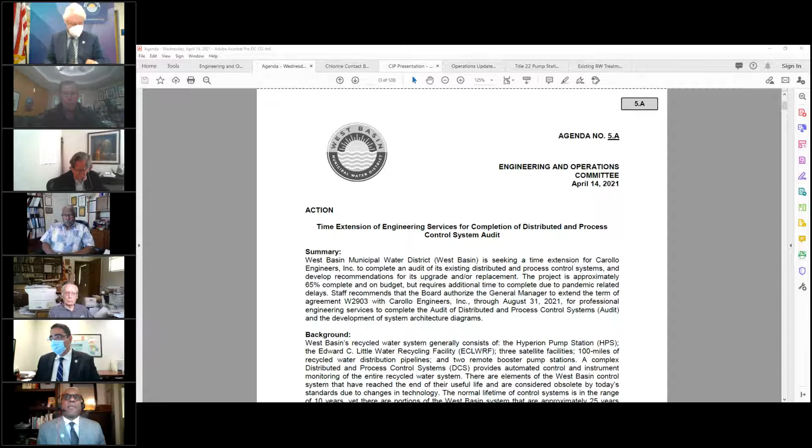In this audit phase, we have 3 major tasks being conducted. The first is the planning and review phase, which is complete. The second is the actual physical audit, task 2, which is conducting the audit and reviewing the findings, and that task has also been completed. The next is the development of technical memos to develop a direction or roadmap for the agency to upgrade their DCS system.

As part of the audit findings, we determined that about 62% of the equipment is near the end of its service life, which impacts the organization and represents a problem for getting spare parts and keeping the system up and operating. Some of the components' technology is as old as 25 years, while the general useful life of a control system is about 10 years. It moves quite fast with the technology, so we have bottlenecks within the system which make it very difficult to get data across.

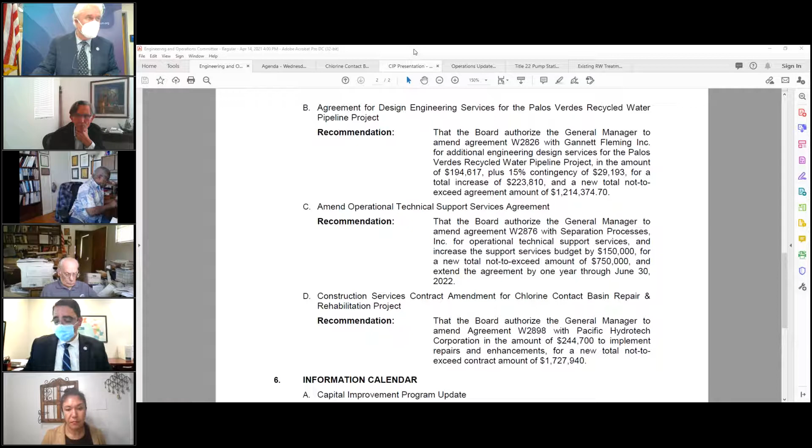And so there's some redesign work and other work associated with the project that we need some additional funds to cover, so we can finalize it and move ahead. We have our excellent supervising engineer, Veronica Govea, who's been with this project from day one. Veronica, would you please handle this matter for the board and public and everybody here? Thank you, Patrick.

Good afternoon, Chairman Alvarez and members of the committee. I'm happy to present this new project. Well, it's not a new project, but better news from the past, in regards to now we have an approved pump station site. So please follow me to agenda number 5B on page 6 of your packet to discuss the agreement for design engineering services of the Palos Verdes recycled water pipeline project.

West Basin and Gannett Fleming entered into an agreement, W2826, for the design of the Palos Verdes recycled water pipeline project. This project consists of approximately 3.6 miles of new recycled water pipeline and will also include a 500-gallon per minute pump station. This project will deliver approximately 240 acre-feet a year of recycled water to 7 sites within the cities of Torrance and Palos Verdes Estates, and this water will be utilized for irrigation purposes, serving parks, schools, medians, and a golf club.

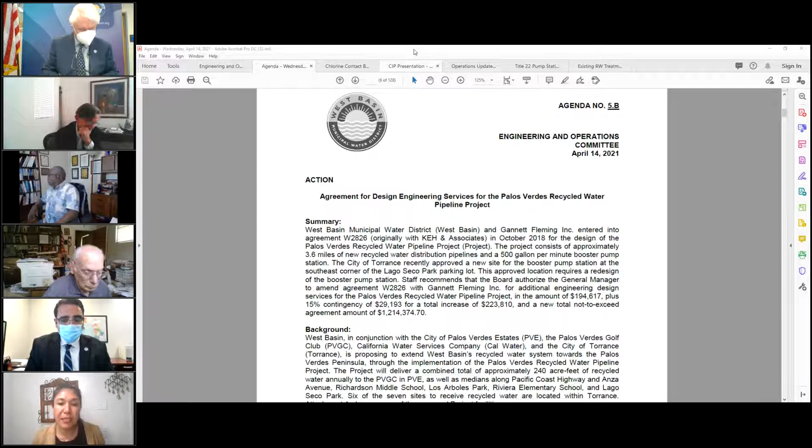On your packet, under page number 10, we included a map of the region. So the alignment, as well as the project sites that will be targeted, can be located on that particular attachment A.

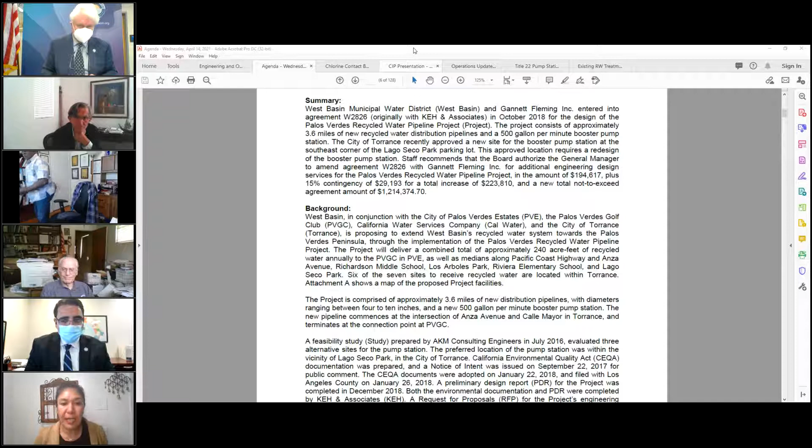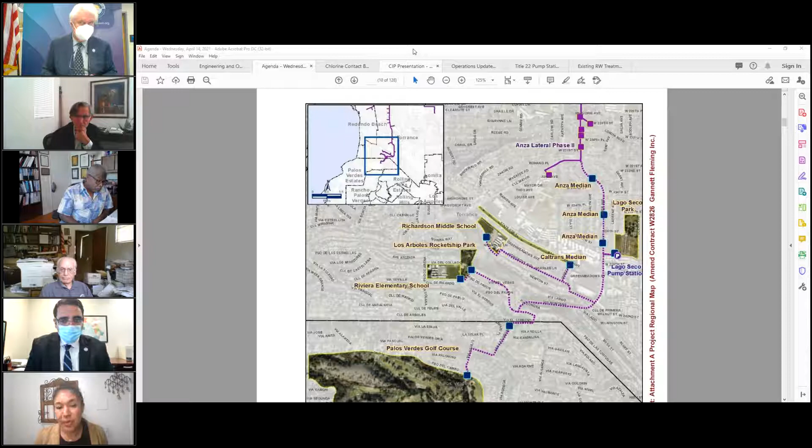To briefly summarize the project, over the last couple of years, staff has been able to complete several items, which includes the feasibility study, the CEQA documentation, the preliminary design report. We have also coordinated staff meetings with the city representatives of Palos Verdes and Torrance. We have performed outreach, advanced the design of the pipeline, and addressed comments received from the public and city officials. We have worked with some permitting jurisdictional entities to advance all the permits needed for the project.

We have also prepared renderings, layouts, and analyzed several pump station sites, as Patrick mentioned earlier today. And again, we have made several presentations to city officials, chambers of commerce, and associations, and we have been able to obtain some project support letters from these entities, which you can also find in your attachments in the packet.

As Patrick mentioned, we recently got approval from the City of Torrance City Council regarding the proposed pump station. It's important to mention that the proposed pump station site that was approved is a new site, 400 feet east from the original location, which was the preferred location that West Basin had originally looked forward to installing this pump station. The new location is still within the same park area; however, this new location was generated from feedback we got as we progressed on this project from the public and from cities. For references on the locations of the pump stations, there are a couple of attachments addressed in your packet.

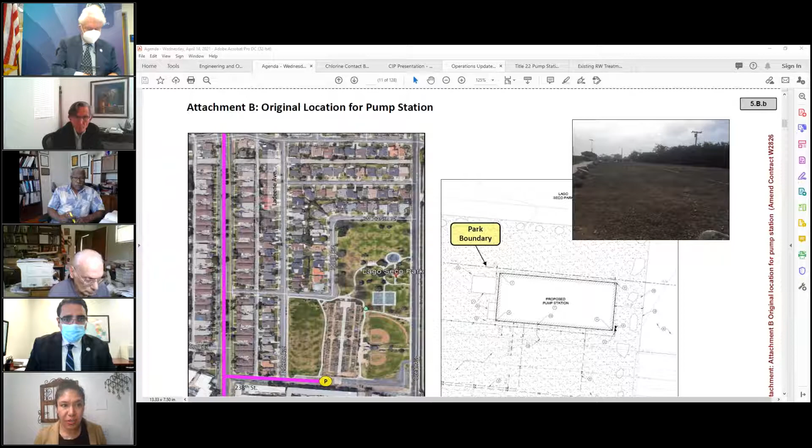One thing you'll notice in this exhibit is that the ground cover is different. On this site there's a parking lot requiring some site adjustments, and there are utilities in the area that we'll need to work around in order to install the pump station in this location.

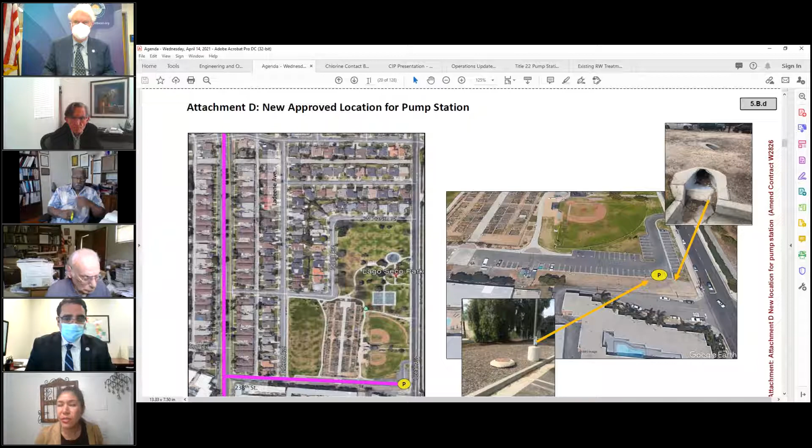To complete the design, we'll need additional engineering consulting services for permitting and design work, including additional geotechnical investigations since this site is outside the original location, as well as geodetic or survey analysis and testing, designing the pipeline extension from the original to the new location, and modifying the existing site and utilities in the area. With this, I will read the recommendation.

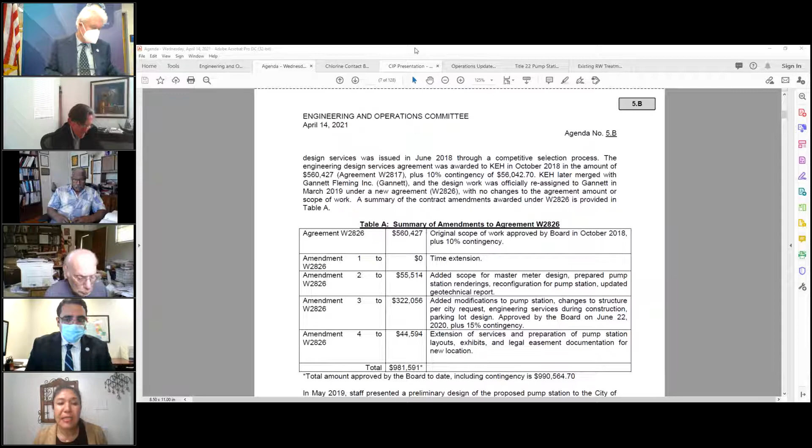The recommendation is that the board authorize the general manager to amend agreement W2826 with Gannett Fleming for additional engineering services for the Palos Verdes Recycled Water Pipeline project in the amount of $194,617, plus a 15% contingency of $29,193, for a total increase of $223,810, and a new total not-to-exceed agreement amount of $1,214,374.70. Thank you for your attention, and I'll be happy to answer any questions.

Okay, well, thank you very much for the report. Any committee member comments or questions? Yes, Mr. Alvarez, if I could.

I'm very excited to hear about this. It was back in March 2016 when I first got really excited about this project, and then things kind of went on hold. One thing we're really concerned about is the public support for the project going up the hill. I know early on there were some people in Torrance with concerns about wanting a water line for the people on the hill, so I hope we were able to work that out through the Torrance city council to smooth that road, so we won't have that problem when they go up the hill.

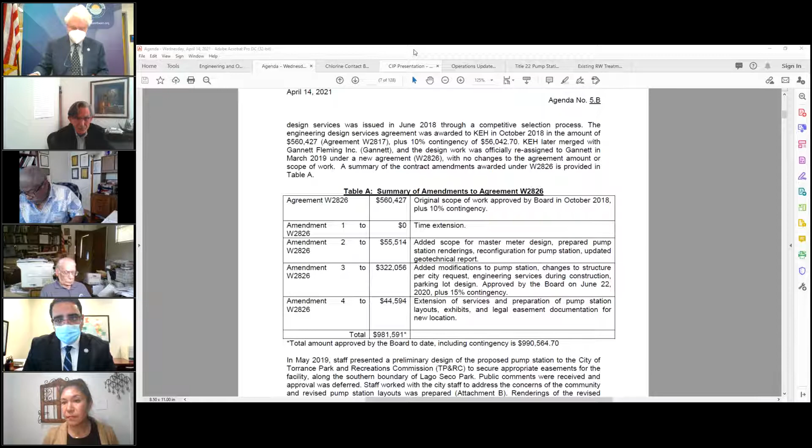Okay, going back to the budget. On this portion, the full $1.2 million that we're, if this approval goes through, money for that is currently available. This is not money that is going to be put into CIP that's subject to the approval of the budget. We're talking about money that is currently available.

The project itself was part of this capital budget approval for this year. We anticipated being in construction right now as we speak, but because of the delays we haven't. So there was, I think it was north of $9 million approved for the capital budget for this project for this fiscal year that we won't be spending in this fiscal year, but it would instead go into the next fiscal year when construction starts.

My question is very simple. The money is currently budgeted for this project when we have the money. Yes.

Okay, next question is, you mentioned that the overall total cost of the project is $12.9 million. Is that inclusive of this, or is that just the construction costs? It includes it. So design, construction, and construction management is going to be about $12.9 million. It also includes all the past costs and feasibility study, PDR, that kind of stuff.

Okay, and if I go to some of the comments that the general manager made earlier, we have right now about $5.6 million that it's either been obtained through grants that have been already approved and or commitments from some of the users.

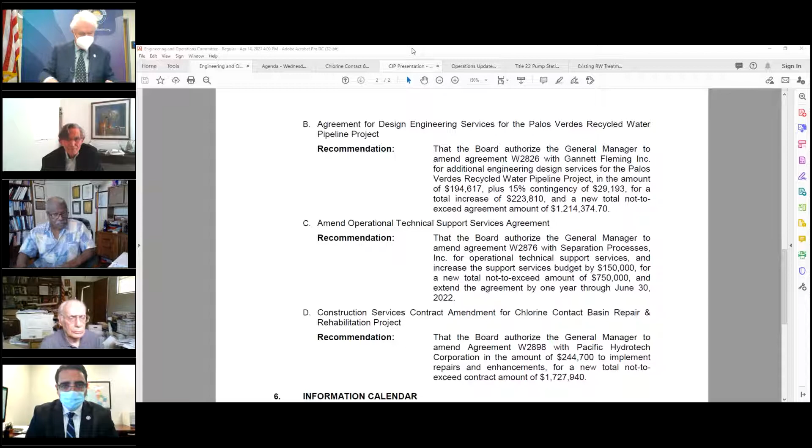All right, next item up. Next item up, Chairman Alvarez, is item 5C. This item is related to the technical support services agreement that we've had in place since, I think, the inception of the entire recycled water program.

And principally this relates to support for the low and high pressure membrane technology, operationally and otherwise — low pressure being microfiltration, high pressure being reverse osmosis. The last time it was bid out, about 18 months ago or a little less than 2 years ago, SPI, with Hazen Sawyer subbing to them for the complete package, were awarded the bid — I think it was $600,000 for 2 years.

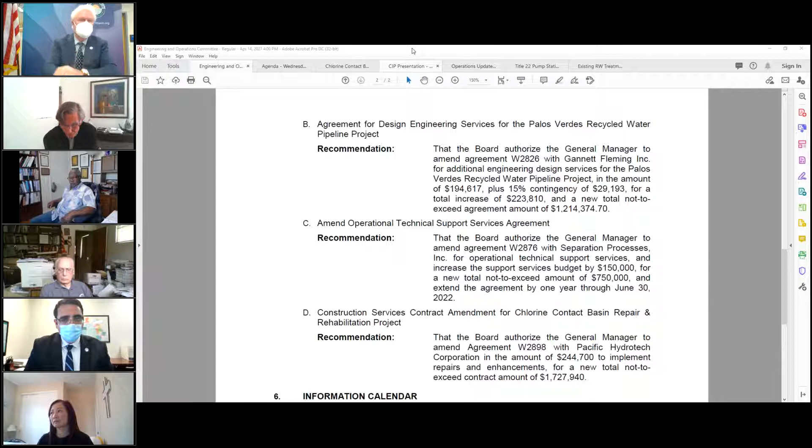And some of the work again was impacted during the pandemic. Some of it wasn't done, some was not completed. Staff here will be asking for an extension of this existing contract with some additional money, not a whole lot, for 1 year, for continuity.

And I understand that we have Susanna Lee here who can speak to the performance of these guys who have been working for us and what we're asking for. Susanna, who's our engineer — operations engineer, I should say. Sorry, Susanna.

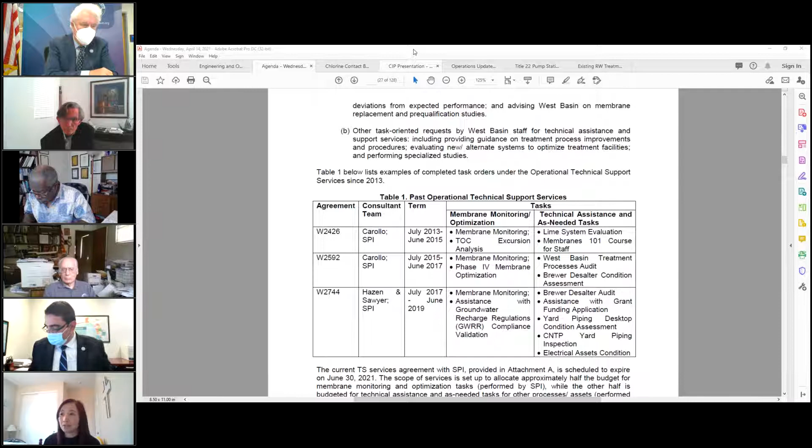For the membrane monitoring and optimization tasks, they include third-party audit and condition assessment of the membrane to ensure we maintain compliance as well as meet customer specifications, and developing trends, analyzing water quality, and troubleshooting any deviations from expected performance. All these are really critical to successful membrane operations and have to be done on a regular basis. Besides these monitoring tasks, consultants in the past have also provided their industry knowledge on membrane applications, development of membrane specs, and valuable inputs in helping West Basin develop groundwater recharge regulation compliance requirements.

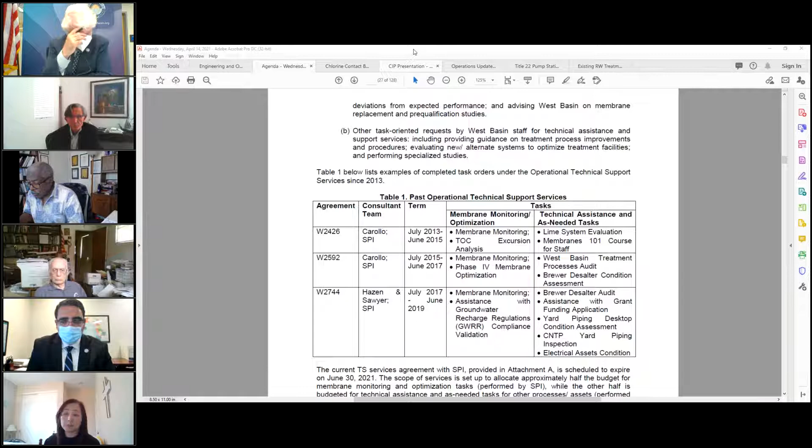On the other tasks, those include providing guidance on treatment process improvements and procedures, and evaluating new and alternative treatment systems for optimizing the current existing treatment facilities. You can refer to table 1 on page 27 of your packet for some of the major tasks done in the previous contracts.

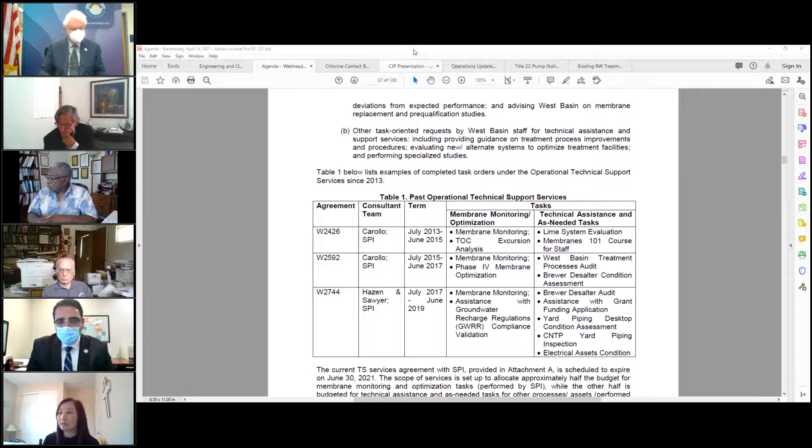Coming back to the purpose of this memo, the current contract, as Patrick mentioned, has a value of $600,000 and is set to expire on June 30th of this year. As mentioned, SPI and Hazen Sawyer are the consulting firms on this contract. The scope of services is set up to allocate approximately half the budget for membrane-focused tasks, headed up by SPI, while the other half is budgeted for technical assistance and as-needed tasks for other processes, mainly performed by Hazen Sawyer. The ongoing membrane-focused tasks have been carried out as budgeted.

However, due to COVID restrictions, much of the as-needed tasks for other treatment processes has been delayed this past year, and we're just resuming those projects or tasks. Table 2, also on page 27, lists the tasks that are ongoing and scheduled to be completed later this year. There's approximately $89,000 of the remaining budget for Hazen planned to be utilized later in fiscal year 2021 and 22.

As Hazen continues to complete these tasks, staff is coming to the board requesting and recommending to provide additional funding to the SPI portion of the technical support services scope, as this provides continuation for the membrane monitoring and optimization tasks. Staff is also requesting a 1-year extension, which will also allow the other technical and as-needed tasks to be completed. Please see attachment B for a copy of the proposal.

Before I read the recommendation, as pioneer and champion for development of the recycling water program, West Basin produces multiple types of advanced treated water and variable source water. This success is really attributed to strong West Basin leadership and dedication from our operators, but also to our partnership with industry experts in membrane technology and other technology.

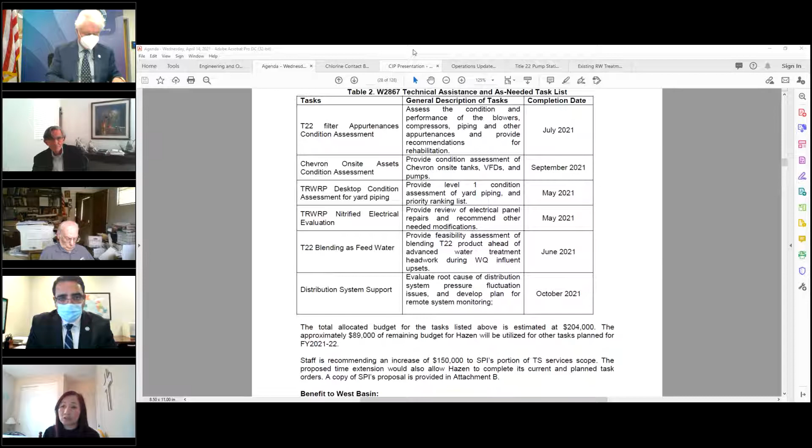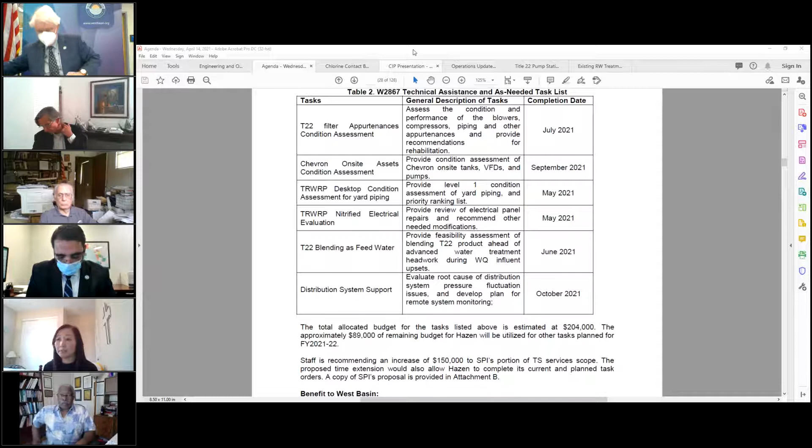This relationship has served as a conduit to allow West Basin staff to have industry insights, not only into membrane technology, but more importantly, to provide information on recycled water compliance and regulators, because many of these consultants serve on expert panels for R&D studies and regulatory committees.

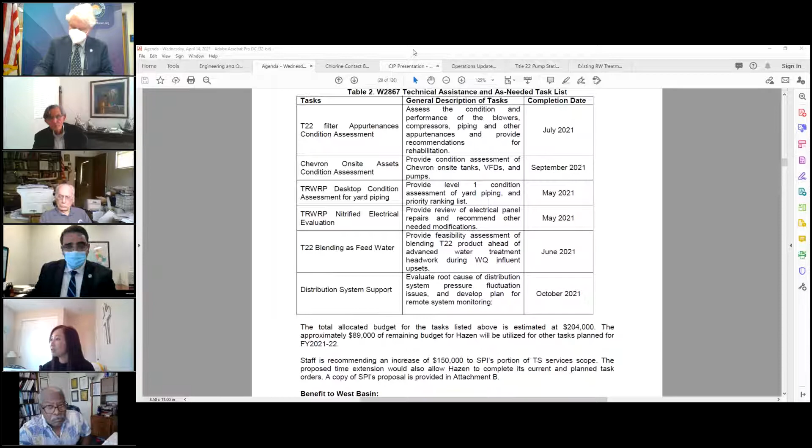So with that, I'd like to read the recommendation: that the board authorize the general manager to amend agreement W2876 with Separation Processes, Inc. for operational technical support services, and increase the support services budget by $150,000 for a new total not-to-exceed amount of $750,000, and extend the agreement by one year through June 30th, 2022. With that, I'd be happy to answer any questions.

Okay, well thank you very much for that report. From the committee members, do we have questions? I have a question: has this process been helpful in getting us the awards that we receive concerning our recycled water system?

In helping us to get what? Because of the quality of water that we produce, the customer relationships that we have—if we were doing a different kind of membrane or whatever, would we or would we not be able to get these awards, to perform at such a high level that we get these awards?

Yeah, I could maybe take a shot at that, Susanna. Good question. One of the very distinguishing characteristics of the success of our Great Recycled Water Program is that West Basin has been a pioneer with membrane technology. We started out with lime clarifiers back in the mid-90s, and then we were the first in the US to go to microfiltration instead of using lime clarifiers as a pre-treatment for RO.

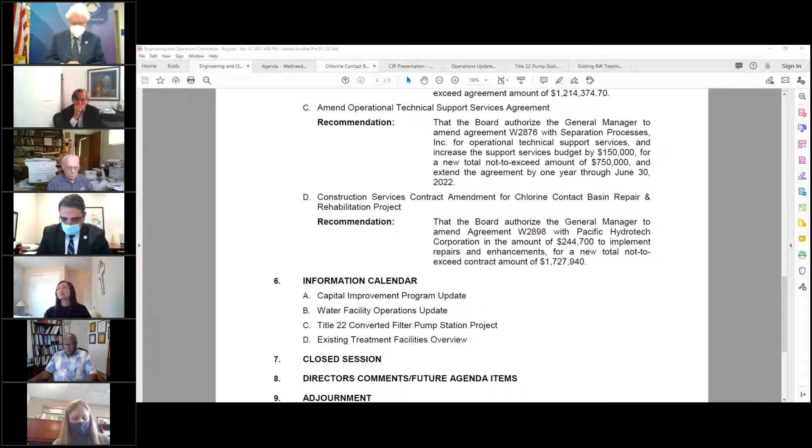So that's the question. Yes, well, if I could direct you to the fiscal impact back at page 29 on this, we have this on every single item we bring to the board. The fiscal impact in this particular one, and this is typical, says funds will be included in the fiscal year 21-22 operations budget. That's what we look at. Looking forward, we're including that in the budget, which the board has to approve.

Okay, any other comments? I would say that we can move this forward with the understanding that Margaret's going to look into finding the $150,000, and that will be included in the recommendation to the full board. Is that okay with you, President Williams? Yeah, I thought we know where the funding's coming from, don't we?

Yep, it's going to be included in next year's budget, but Director Alvarez is saying for this, he wants to deviate from that normal process and have the recommendation include money taken out of designated funds, assigning that $150,000 to cover next year. So it wouldn't be in the budget, kind of sort of, but it would be part of the recommendation. So we have to look into that.

Yeah, well, I think that should be done during the budget process. But for this, I would approve it. I wouldn't say I wouldn't approve this, but I do approve this going forward. I don't see anything that would stop it from going forward, so when Margaret's work on changing the way we encumber the funds wouldn't affect this project at this time. Follow me?

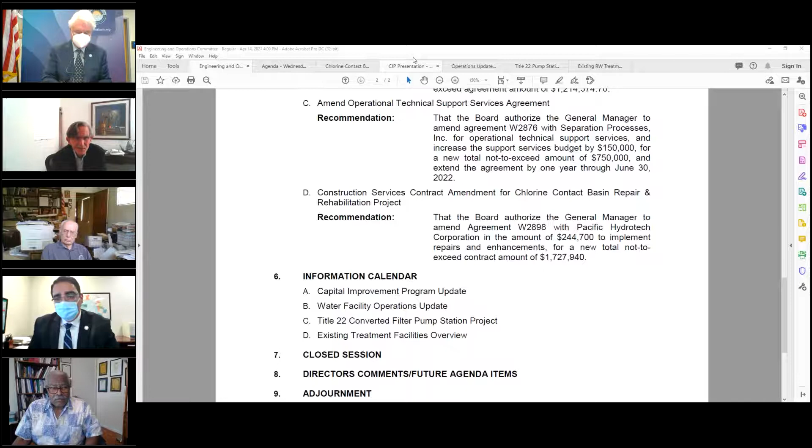So my understanding, and what I'm supporting and recommending, is that we move this forward, and in that process we take $150,000 out of reserves. Those are not committed to anything—that's reserves. I'm sure we've got $150,000 in reserves that will then be allocated to fund the project at the time the extension's approved by the board in a couple of weeks.

Okay, no confusion here. That's what Margaret will look into, and if that's all a go, we'll word it as such. Is that okay with you, President Williams? No, but I'll go along with it.

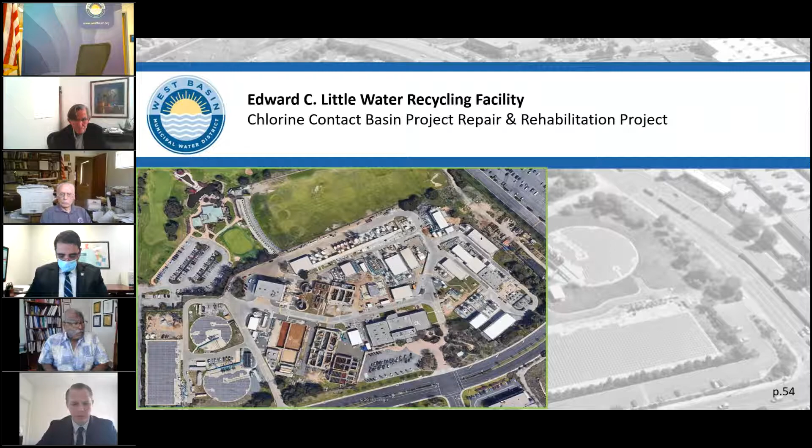Just to give a quick overview of the basins themselves, here's an aerial view of the Edward C. Little facility. Patrick mentioned they're in the southwest corner of the facility along Sepulveda Boulevard and Hughes Way, right at the corner. There are 6 chlorine contact basins in total.

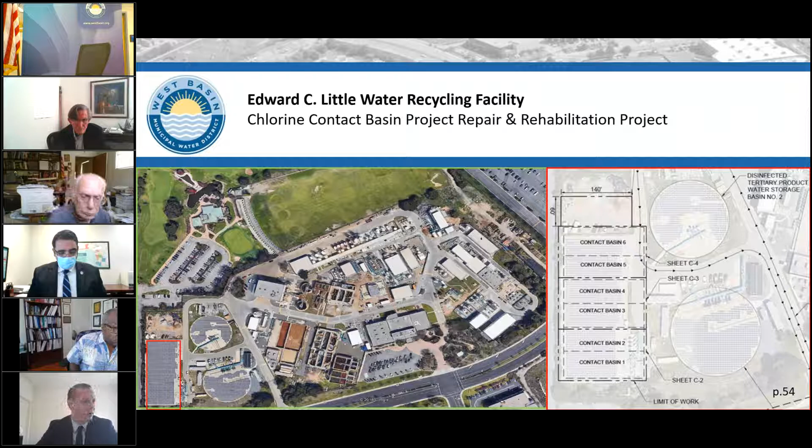They serve as the last stop in the treatment train for our Title 22 water quality—that's our irrigation water quality that goes out to many of our customers, as well as all the satellite facilities. So it's a very integral part of the process at the facility.

These are underground basins, so when you're out on site at Edward C. Little, you can't really see much. All you see is a bunch of solar panels, but underneath those solar panels are 6 basins. Here's what they look like if the lid was removed. As Patrick mentioned, they're set up in a serpentine-like manner.

You can see there's 1 slide gate for each basin that controls the influent water. That's followed by a dispersion wall that helps break up the flow and disperse it before it hits the first baffle wall. Following the dispersion wall, there's a series of 4 baffle walls for each basin. Essentially what these baffle walls serve to do is slow down the flow of water to provide the specified contact time that our Title 22 water quality needs to ensure proper disinfection.

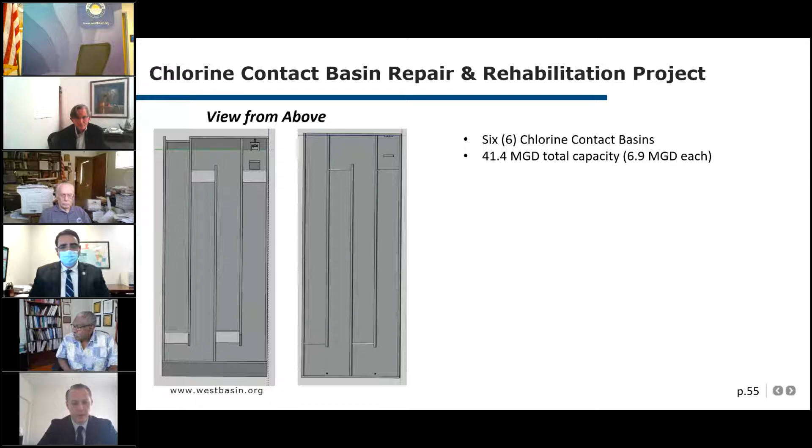So across all 6 basins, they're capable of treating about 42 mgd. I think currently we push about 30 mgd through them. Each basin has 4 channels. They measure about 123 feet long, 11 feet wide, and 14 feet deep. So these are fairly large underground basins. Patrick mentioned the total volume is over 500,000 gallons, about 1.7 acre feet. So pretty significant volume there.

So essentially we were going to replace all 6 slide gates, 1 for each basin, all 24 baffle walls, which were previously made of redwood, now installed with a more chlorine resistant fiberglass reinforced plastic, also called FRP. We also replaced the 12 mud valves, 2 for each basin, that help drain down the water to facilitate cleanings, as well as the high pressure water supply piping that allows us to clean the interiors of the basin.

As Patrick also mentioned, the project is substantially complete now. The contractors completed 100% of the base scope of work. Overall, it was a great project, a great success. We came in under budget and on schedule, under budget in all 3 categories as well, which was pretty unique. We were under budget on the construction side, under budget on the CM side, and also on the design side.

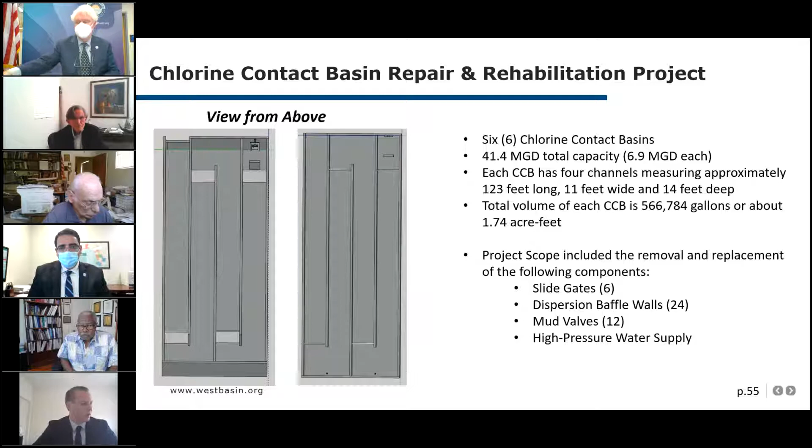I wanted to also highlight a few of the construction elements. It was a pretty unique project in that we really couldn't begin any of the work until the slide gates were replaced. Some of the seating gasket material around the slide gates had begun to fail and wasn't providing a complete seal when the basin was closed and attempted to be drained down. So we actually used divers, and we replaced all 6 slide gates with the use of divers while the basins were in service. Pretty neat construction feat.

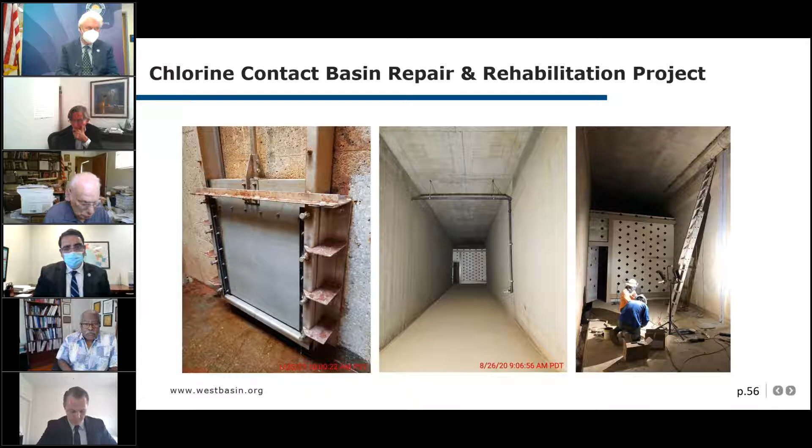So ultimately what we found was that the forces from the initial filling of the basin created an excess pressure, an abnormal pressure essentially, and that pressure was greater than the initial design strength of the baffle wall.

So it is a good thing we caught this now before the project was complete, and we completely released the contractor. We're able to engage them as well as the design engineer, the operations team, myself, and the construction management team, and together we've come up with a proposed solution that will fully fortify these baffle walls and provide for a more flexible operation moving forward. As I mentioned earlier, that solution is a third horizontal cross member.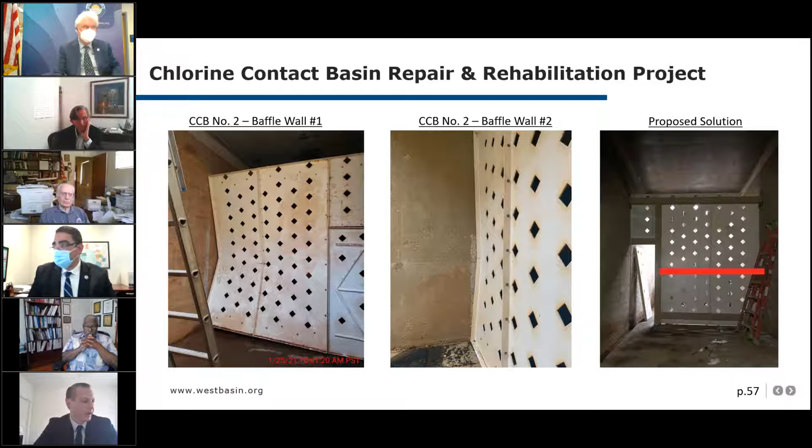After a couple months of detailed discussions with the design team, doing long-hand calculations and calculating the forces, we realized that we did exceed that 18 inches of differential head strength. We also did a pretty neat computational fluid dynamics model. Essentially, what this does is model the basins in real time—we mapped out the baffle walls exactly how they're built, exactly how the channels are built. Through simulations, we found that we were exceeding about 20 inches of differential head strength.

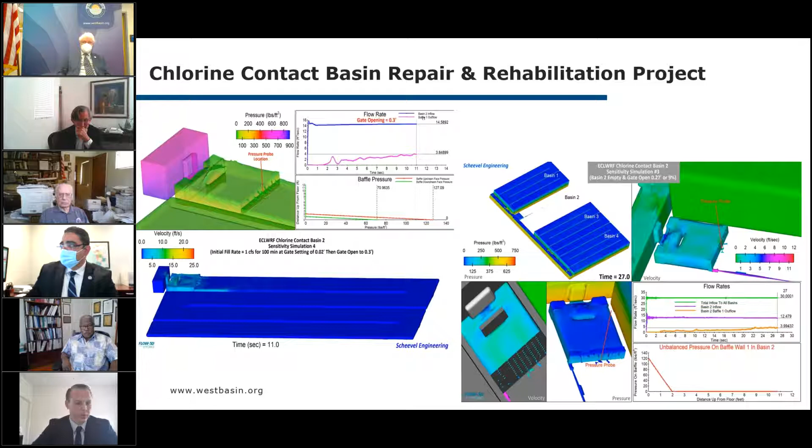So looking forward, we've designed an improvement to our system—the new baffle walls. Here's a simple cut sheet of what the improvement will look like. It'll allow up to 48 inches of differential head pressure, creating an operational environment that's fail-safe with a safety factor of well over 3.0.

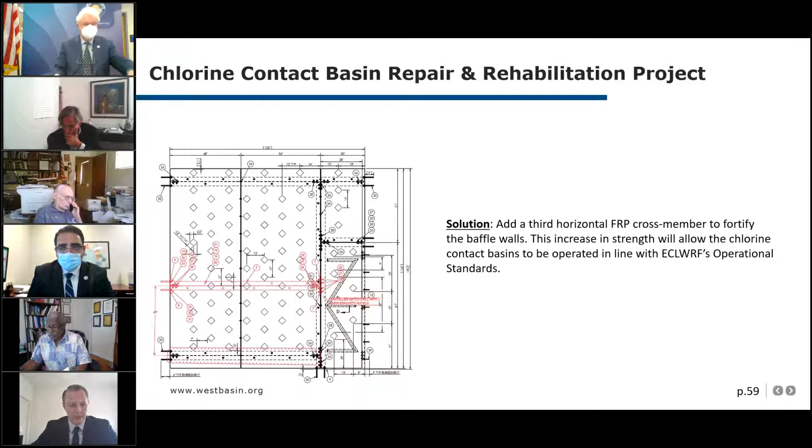So ultimately, the recommendation I'm providing today is that the board authorize the general manager to approve the specified amount, but that we proceed on a time and materials basis, and I think we'll be able to capture some additional cost savings there. So with that, I'd like to read the recommendation.

The recommendation is that the board authorize the general manager to amend agreement W2898 with Pacific Hydrotech Corporation in the amount of $244,700 to implement repairs and enhancements, for a total not-to-exceed contract amount of $1,727,940. With that, I'd be happy to take any questions.

All right, thank you very much, Kevin.

Any comments from the committee members? Yes.

Question: is this amount a change order to the contract or an amendment to the contract, or what? And then the follow-up is, who pays for this?

Correct, yes, this would be a change order to the contractor. We've been able to successfully issue two previous change orders using the approved contingency. We were able to address a few changed conditions, a few extra points of corrosion and leaks in the basins, so we utilized the previously authorized contingency funds for those outside-scope items. But yeah, as mentioned, we would be paying for this at West Basin.

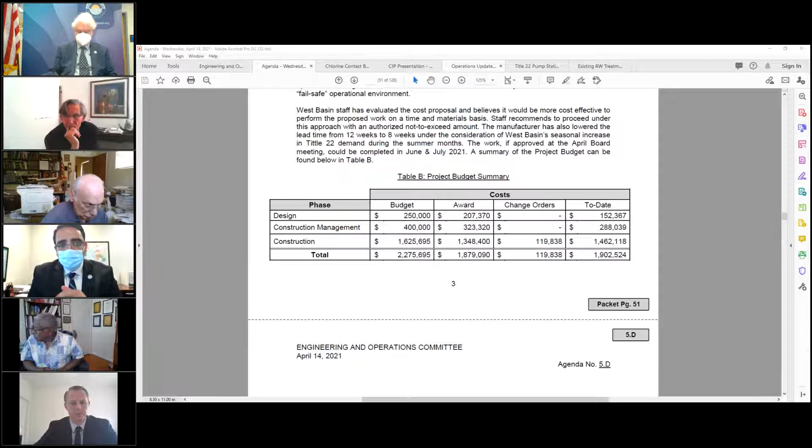If there's no other questions, should we move this forward to the board, President Williams? Yes, we should, but we should make sure that someone else pays for the actual costs of these repaired baffles, because we bought new gates, not repaired gates. So we need to get that money. Okay, with that caveat, let's move this forward to the full board.

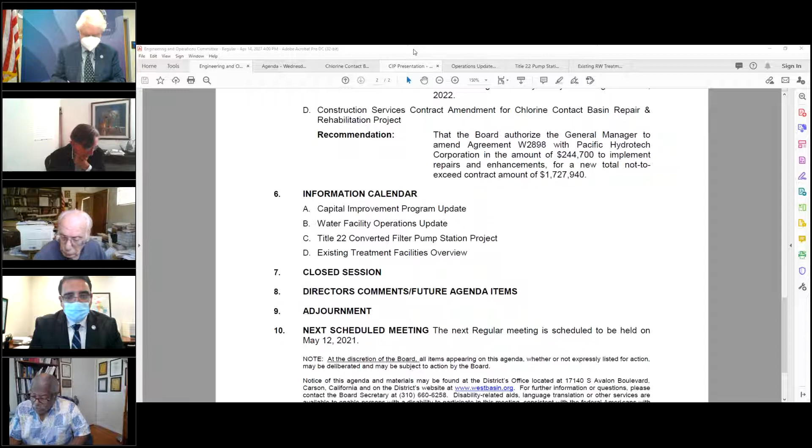All right, so with that concludes the action calendar, and let's move on to the information calendar. It's been a little bit longer than I thought we were going to take to go through the action calendar. So in the information calendar, if we can just move forward right now to item 6D and go over the existing treatment facilities overview, and if there's time, we can then go back to the other items on the information calendar.

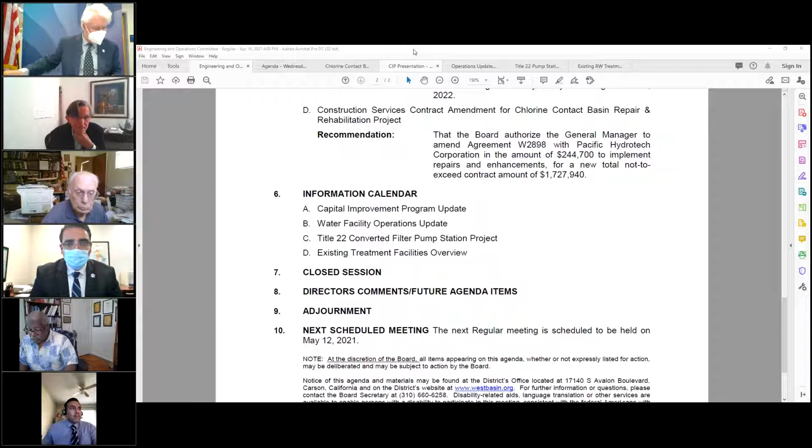So yeah, this is an item that Chairman Alvarez asked to have us put on the agenda. The high-level overview of it is to look at all of our treatment processes and one of our major facilities, which is the Hyperion pump station as a facility. It's not a treatment process. And then the Edward C. Little plant and the 3 satellite plants. So look at them with a view to capacity and what happens at each part of the process once you get into the plant. Where does the water go? It goes from here to here, and then where? What's the treatment flow process look like? And staff has attempted to put all of that together with a lot of historical data on flows and other data for context.

So we have our engineer here, Orlando Rodriguez, and we have some folks, I believe, here from HDR on the line too. But Orlando's going to present a PowerPoint presentation, which hopefully you got yesterday or today, to walk us through the existing recycled water treatment flow, sort of from a process standpoint, from beginning to end. So Orlando?

Yeah, thank you, Patrick, for that. Could everybody hear me and see my screen, the presentation? Yes, go ahead, Orlando. Perfect. Thank you. So good afternoon, Chairman Alvarez and the members of the committee.

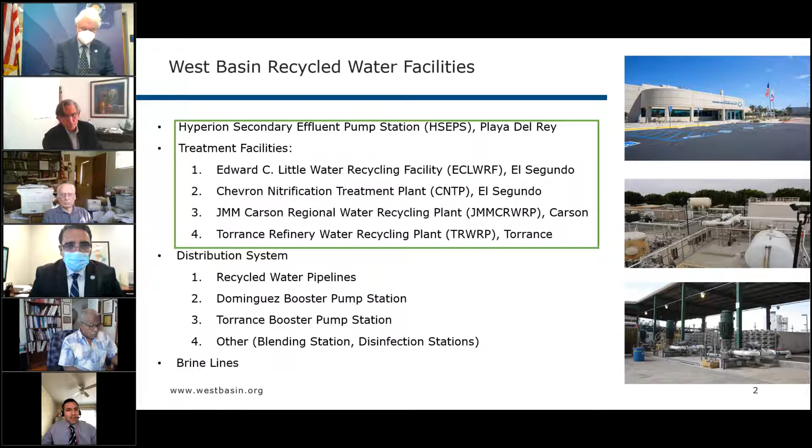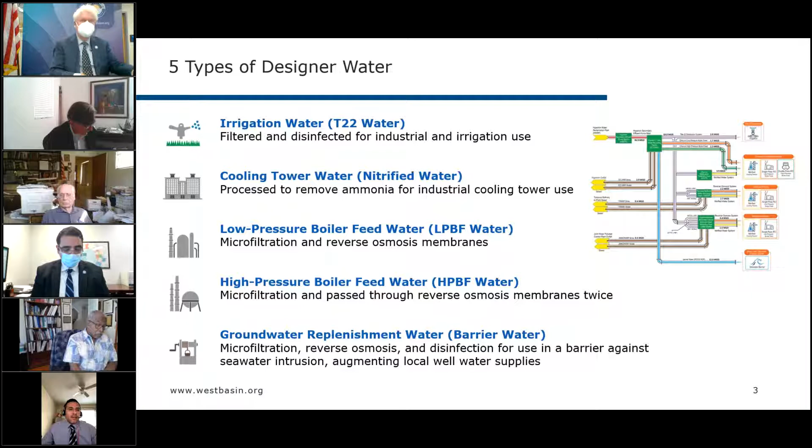Now, please turn to slide 3 of your presentation handout. As it stands, West Basin currently produces 5 types of designer water to meet its customers' needs, from oil refineries to golf courses, parks, and many others. Disinfected tertiary treated water, often referred to as Title 22 water, is mostly used for irrigation purposes and some industrial applications. Nitrified water, which is essentially ammonia-free recycled water for cooling towers, low pressure boiler feed water, and high pressure boiler feed water for the refineries, and groundwater replenishment water, also referred to as barrier water, for use as a barrier against seawater intrusion. Here on the right of this slide is a process flow schematic, which is attachment A of the staff report, showing a simplified interfacility process flow schematic with the various types of designer water produced at the treatment facilities. Now, please turn to slide 4 of your presentation handout.

Shown here is a simplified diagram giving an overview of the recycled water process and the designer water produced at each treatment facility. At the start, a portion of the Hyperion water reclamation plant secondary effluent is pumped by the Hyperion secondary effluent pump station to the Edward C. Little facility. The Edward C. Little facility produces 4 types of designer waters: barrier water for WRD for the seawater intrusion barrier, low pressure and high pressure boiler feed water for the Chevron refinery in El Segundo, and Title 22 water for irrigation customers, as well as to convey to the satellite facilities for further treatment.

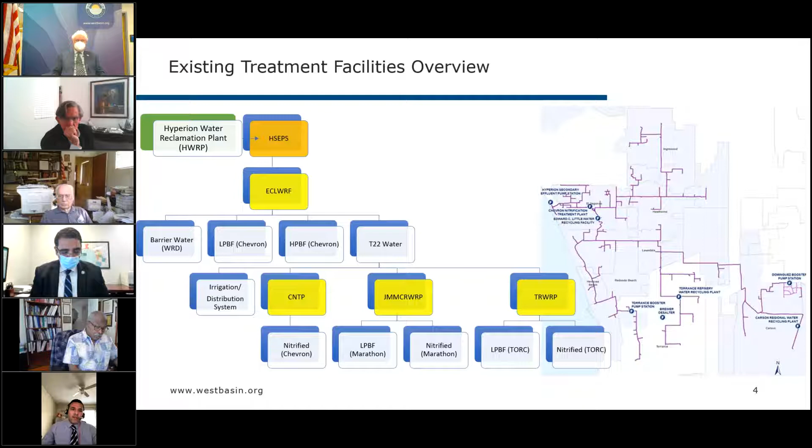Then you have the Chevron nitrification treatment plant, which produces nitrified water for the Chevron refinery. The JMM Carson plant produces low pressure boiler feed water and nitrified water for the Marathon refinery in the city of Carson. And the Torrance plant, which produces low pressure boiler feed water and nitrified water for the Torrance refinery, currently owner operated by the Torrance Refinery Company.

Here on the right of the slide is an exhibit showing our recycled water distribution system pipelines in purple, as well as our treatment facilities, including the Hyperion secondary effluent pump station shown at the western most point. Going a little east, you see the Chevron nitrification treatment plant, as well as the Edward C. Little facility in the city of El Segundo. Further southeast is the Torrance refinery water recycling plant, and further east of that is the Carson regional water recycling plant.

Now please turn to slide 5 of your presentation handout.

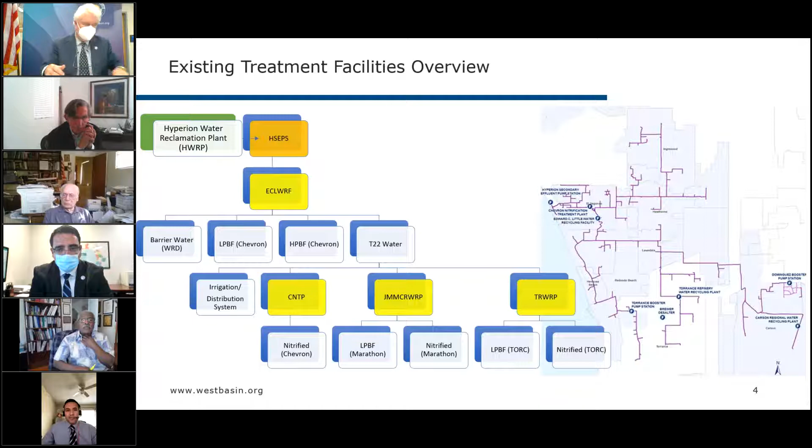As previously mentioned, the Edward C. Little facility is the only treatment facility that receives secondary effluent from the Hyperion secondary effluent pump station. Built in 1994, the original pump station includes 4 vertical turbine pumps with a firm capacity of approximately 51 MGD. Improvements to that pump station were recently completed in 2019, which added 3 new vertical turbine pumps with a firm capacity of approximately 40 MGD, and also provided a secondary power supply source for increased reliability. Between the years of 2016 and 2019, the annual flows averaged about 36.8 MGD. The pump station sends secondary effluent to the Edward C. Little facility via a 60-inch PVC lined reinforced concrete force main.

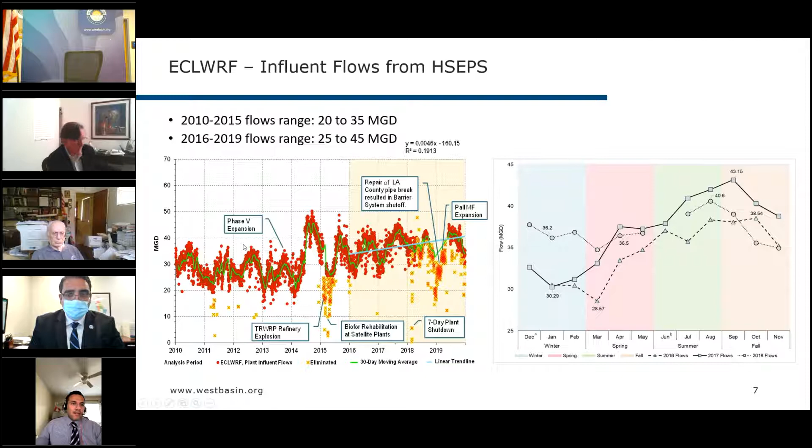All right, now please turn to slide 8 of your presentation handout.

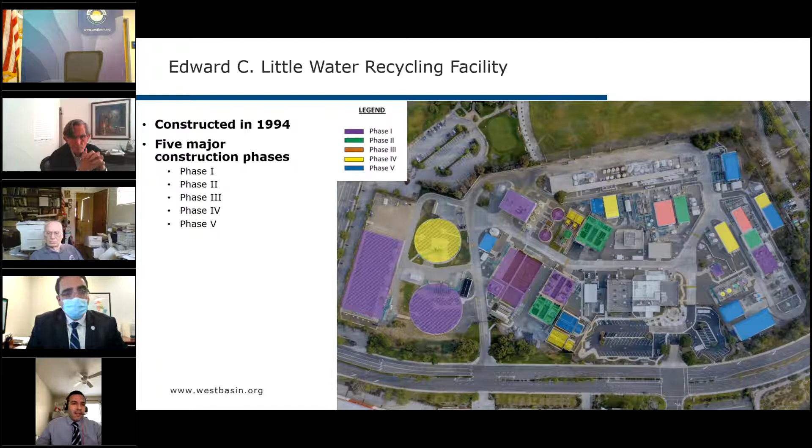Now, please turn to slide 9 of your presentation handout.

If I can interrupt you, Orlando, can you do me a favor? You just went over all of the different expansions and the capacity that was added, and I think it shows up in some of your slides coming up. But could you tabulate basically the summary you just presented and send that to us at your convenience, please? Sure, no problem, Director. Let's see. Okay. All right.

Anything else? I'll go ahead and continue. There will be some comments, but keep going. You're doing a great job.

All right, so here the Edward C. Little facility performs different treatment processes to produce 4 different types of designer water. I'm going to go into a little bit of detail right now, explaining exactly what happens.

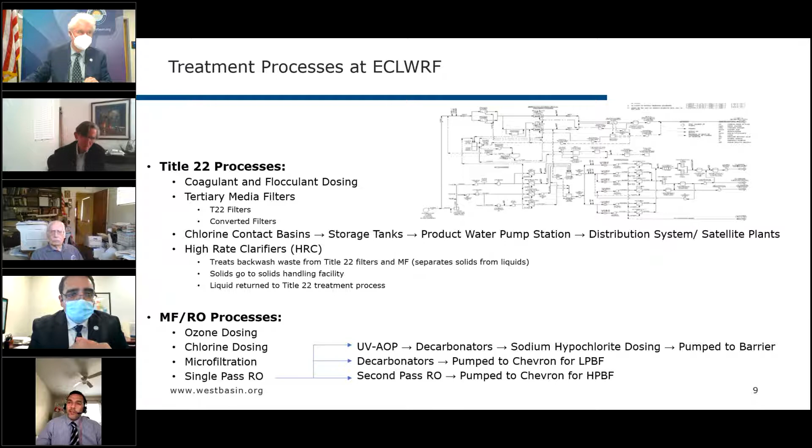Good question, Director Alvarez. That's coming up too. Orlando, I'll give you first shot on this. Go ahead. Yeah, so the demands are actually controlled by LA County, Director Alvarez. They demand the water for the... let me go to slide 5.

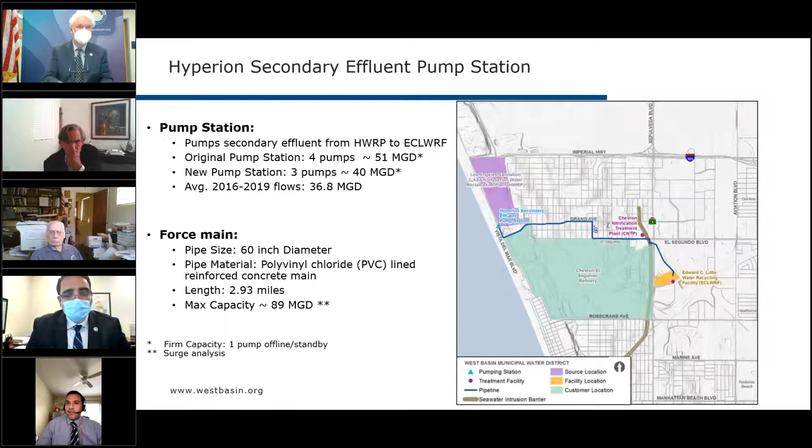I'm sorry, just quickly so we could see. Oh, sorry. So yeah, just like I mentioned, the demands actually come from LA County for the injection, for their well system for the barrier. So we don't actually necessarily send the maximum amount that we're capable of. They demand it, and then we send it as it is demanded for the system. Subsequent slides, I was going to go over that, but that's been averaging about 12 to 14 MGD. So we could send more, but it's not controlled by us. Essentially, it's controlled by the county.

Okay, but 100% of the water that goes into the barrier is purchased from West Basin Municipal Water District, correct? Correct. Mm-hmm. So why? I understand that the county operates the barriers. I understand that the county will say we're going to shut down part of the barrier, so we're not going to take water for a period, or take a smaller quantity of water. But why is it that we're still selling imported water and not 100% MFRO water to the barrier?

Okay, let me take a shot at answering that. Good question.

So just not to belabor the point about the county dictating the amount, they're following a level in the aquifer that they don't want to exceed and they don't want to go below. If they go below, they need more water, and if they go too far below, you have seawater intrusion. So they're chasing this level. And as you pointed out, there's also variables like how many of the 157 wells in the north and south leg are in or out of service at any given time. So we're kind of chasing that goal given by the county.

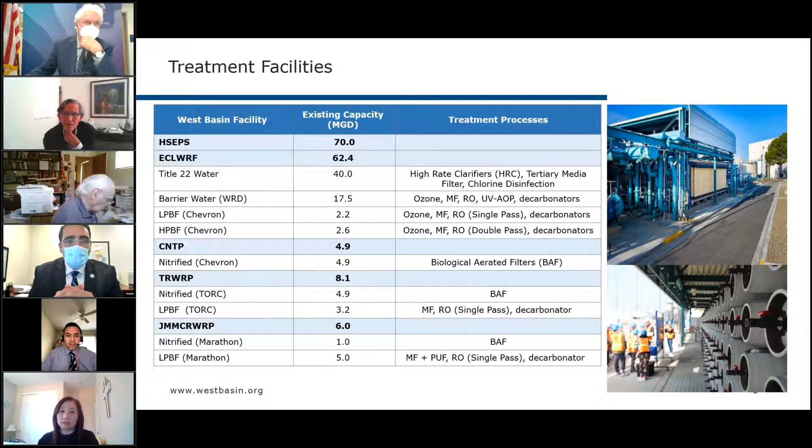Director Alvarez: That is the capacity currently, the 17.5 MGD. We can, while serve 100%, maybe I think the county has indicated to us in the past that for certain operational reasons, meaning the operation of the valves or the velocity in the pipelines, to make sure that there's at least a little bit of potable water still moving. So that's one aspect, but that's just a little bit. So it might not be exactly 100%, but very close to 100 is what we try to achieve.

Remember that the water you're putting directly into the aquifer is potable water. Right, okay. So the only reason we wouldn't be putting 100% recycled water is because we've got some limitations at the Edward C. Little plant in producing that water.

As Susanna mentioned, we've had some limitations in the past. Right now with the capacity, if you can see the trends, and we'll be happy to kind of bring back the trending over the years on how much recycled and how much potable went into the barrier. We've done that presentation. I think the last time we did it was in December, showed the mix of recycled to potable that went into the barrier. We can certainly bring that back and kind of show you that in recent years, we've been very close to 100%.

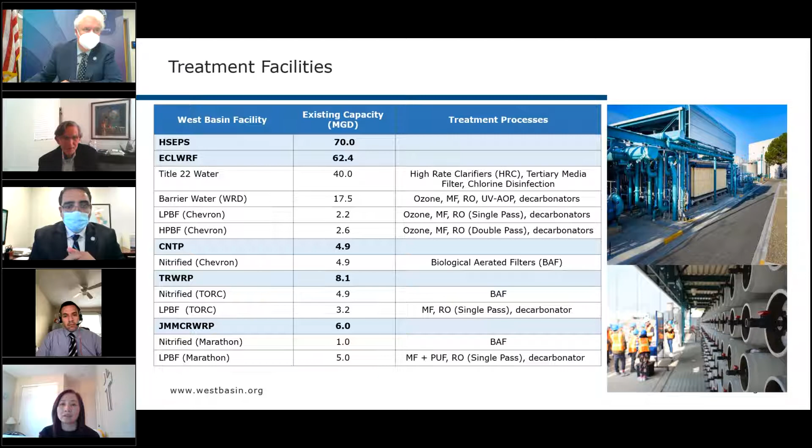It's just that as we move forward, we pride ourselves in being an agency that wants to move and replace imported water with recycled water, which is really the goal that we should all be trying to achieve. So I just want to encourage us to continue in that fashion, and if the limitations are in our treatment processes, then we need to address those. That's what I'm trying to get a handle on. No, very, very good points, and that's certainly our goal.

When this project started in 1995, it was 50% imported, 50% recycled water. Then it went to 75%. Now we're at 100%, and usually, barring any things that Susanna mentioned, we can do that if allowed to put 100%. But certainly, yeah, that's definitely the goal, I think, of everybody. That's one of the things we're proud of, all that imported water that used to go into the barrier, 100% is predominantly recycled water now.

Going back to the capacity, the barrier, like if you say 100% is 17.5, but there's no redundancy built into that. So I just want to point that out. If we want to have a sustainable 17.5 as a 100% goal, we'll need additional RO trains. That's my question. Thank you.

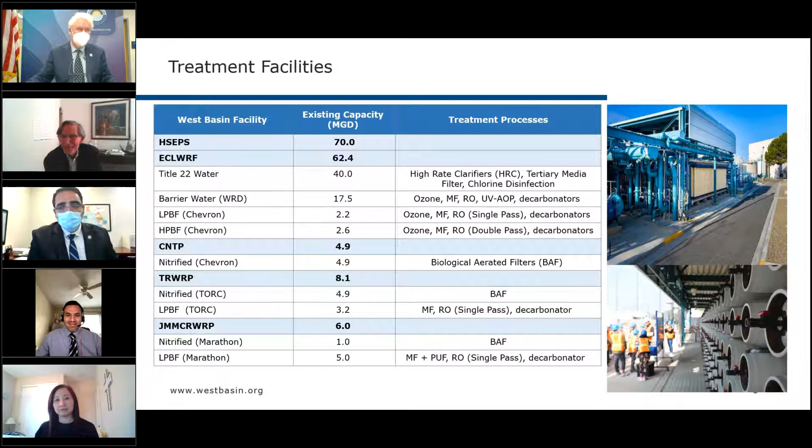Okay, Orlando, move on. Okay, we'll add that to the capital program, Desi. Well, there's the big question of, where are we headed? Go ahead, Orlando. Okay, let me just go back to the slide that I left off.

All right, so here, okay, so it's kind of like where I left off. So I'm still talking about the Edward C. Little facility here. I think actually, I think I talked about this slide. Sorry, Director Alvarez, I'll just go over it again just to be on the safe side.

So here, the figure on the left displays the Title 22 product flows between 2010 and 2019, which ranges from 12.5 MGD to 25 MGD. The figure on the right here specifically illustrates product flows from 2016 to 2018, which shows seasonal variation. Title 22 product flows peak during the summer months and dips during the winter months because irrigation users utilize more water during the hotter months.

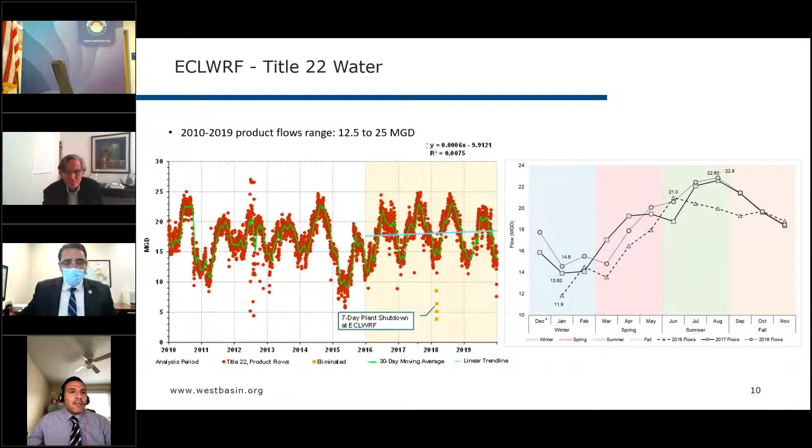Now, please turn to slide 11 of your presentation handout.

I know we went over this a little bit, but I'll quickly recap the barrier water. As mentioned, the Edward C. Little facility produces barrier water delivered to LA County's well system, which is injected into 157 wells connected by approximately 9 miles of pipeline, all the way from the city of El Segundo down to Palos Verdes. Here on the figure on the right, it displays the barrier water product flows from 2010 to 2019.

The barrier water typically does not display any kind of seasonal patterns, as it's controlled by the county and their demands. As Barkev mentioned earlier, we have the capability of an instantaneous capacity of about 17.5 MGD, and recently the typical product flow range has been between 10 and 14 MGD.

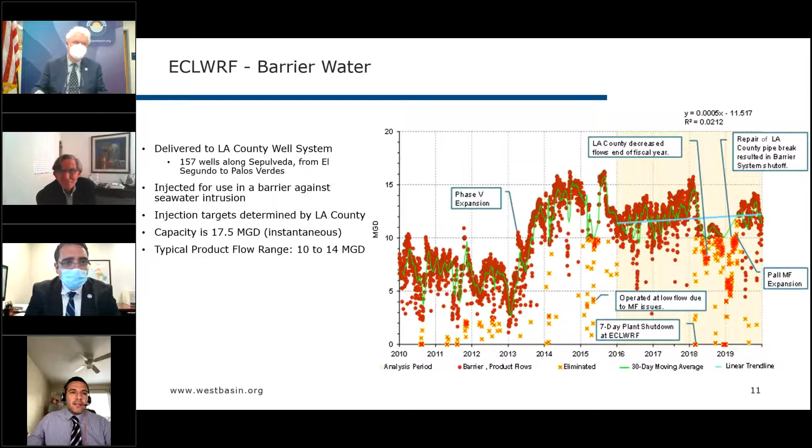Go ahead. Okay, so going on, please turn to slide 12 of the presentation handout.

Continuing the discussion here for the low pressure and high pressure boiler feeds to the Chevron refinery. The figure on the left illustrates the low pressure boiler feed product flows between 2010 and 2019, with a range from 1.5 MGD to about 2 MGD. The figure on the right illustrates the high pressure boiler feed product flows during the same time span, ranging between 1.8 and 2.6 MGD. Just to note, these boiler feed product flows do not exhibit any seasonal variations because they typically depend upon the industrial demands at the refinery.

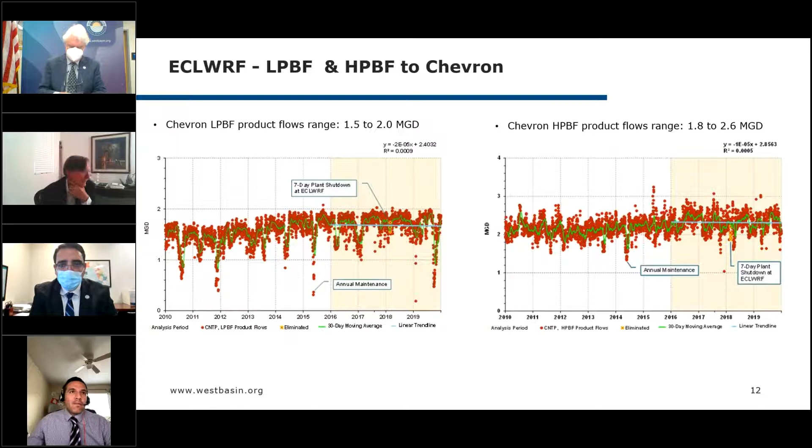Now please turn to slide 13 of your presentation handout. As a result of the RO process, an RO concentrate is produced containing nutrients and organic compounds that is considered a waste stream. At the Edward C. Little facility, the RO concentrate, also referred to as brine, is conveyed through a brine line to the 5-mile Hyperion ocean outfall. The brine line is an 18-inch outside diameter HDPE pipeline, approximately 3.39 miles in length. From 2016 to 2019, brine flows averaged about 2.9 MGD.

One thing I also want to note, when considering any kind of RO membrane expansions at Edward C. Little, we want to give consideration to the maximum capacity of the brine line. But just to caveat that, we do have capacity right now. So it's just a thing to note when we do any kind of RO expansions at the facility.

Here on the figure on the right, it also shows the pipeline alignment of the brine line, and you'll probably notice that it mimics the force main alignment. The real difference here is that the pipeline actually goes further north beyond the Hyperion pump station, then ultimately reaching the Hyperion ocean outfall.

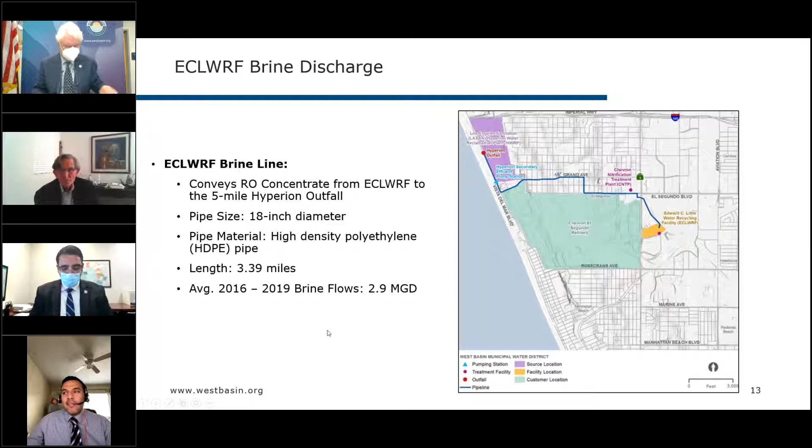So just to recap, we just finished the discussion on the Edward C. Little facility, and now I'll be moving on to the 3 satellite facilities. I'm starting with the Chevron nitrification treatment plant, which was constructed in 1997 and is owned and operated by West Basin. Here below you see a process flow schematic of the treatment plant, which I'll go into in detail now.

The nitrification process has 4 upflow biological aerated filters, also referred to as Biofors, that perform nitrification to convert effluent ammonia to nitrite and nitrate. Sodium bisulfite, sodium hydroxide, and carbon dioxide are dosed upstream of the Biofors to remove the chlorine residual, add alkalinity, and lower pH to mitigate any nozzle scaling.

The treatment plant operates at 1.25 mgd per Biofor unit, with double the ammonia concentration, resulting in some ammonia breakthrough in the Biofor effluent. The Biofor effluent is dosed with sodium hypochlorite into a breakpoint reactor to provide just enough contact time to convert any remaining ammonia into chloramines.

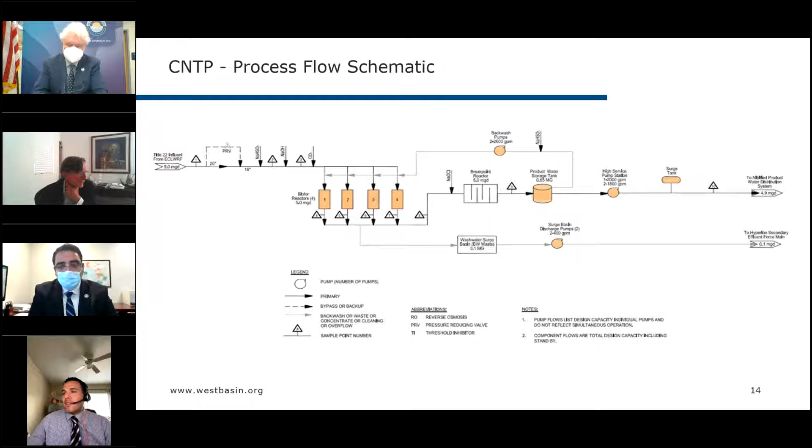This particular treatment plant has the capacity to produce up to 4.9 mgd of nitrified water. Here on the figure on the right shows the historical production flows between 2010 and 2019. More recently, production flows have averaged about 3.9 mgd between 2016 and 2019. Product flows at the treatment plant have exhibited some seasonal variations, with higher demands occurring during the summer months.

Any questions? Yes, is some of that decrease just due to changes in the overall production and demand at Chevron, or is that just due to limitations of the plant?

I don't want to misstate this, but my understanding is we're not at capacity because there is more ammonia breakthrough, or ammonia in the effluent that we receive, so we're below the 4.9. I'm not sure if I'm answering your question, Director Alvarez, but let me answer that. Chairman Alvarez, good observation. So the plant's capacity is 5 mgd, or 4.9 as indicated here.

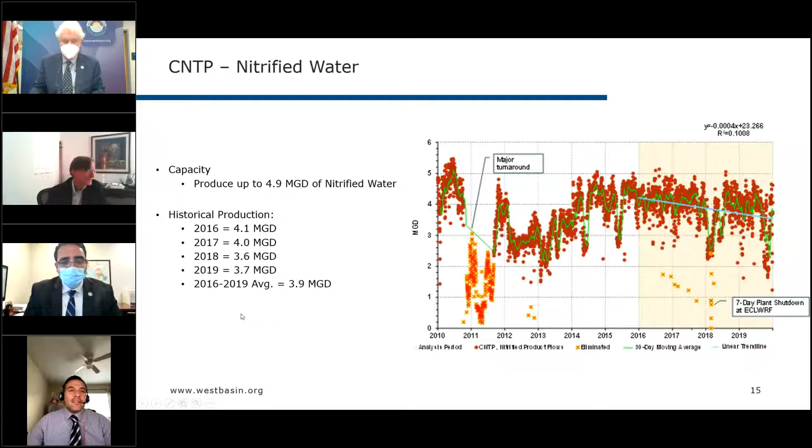Now moving on to the Torrance plant. Construction on the Torrance refinery water recycling plant was completed in 1996 and is operated by West Basin on land that is leased from the Torrance Refinery Company.

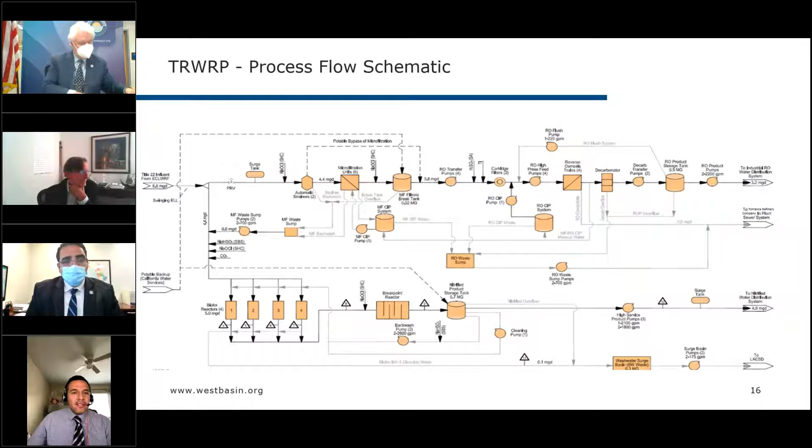All right, now please turn to slide 17 of the presentation handout. The Torrance plant has the capacity also to produce up to 4.9 MGD of nitrified water. Here on the figure on the right shows the historical production flows between 2010 and 2019. Production flows have averaged about 2.7 MGD between 2016 and 2019.

Any questions here? Go ahead and move on. So similar questions to Chevron - we pump the Title 22 water over here, and then we nitrify the water. Are we meeting all of their needs, or is this for some of their cooling towers and not all of their cooling towers? What do we know?

We are meeting their needs. I don't know - Lorenzo, are you on the meeting? Our Suez operations manager. Lorenzo, can you clarify a little bit of the demand from the Torrance refining company? The Torrance refinery currently has 6 cooling towers in the whole refinery, and they're all on recycled water. We are meeting all their demand - they only put recycled water in all the towers. And what you see on this chart, you may notice they used to take a lot more water earlier in this decade - they used to have 7 cooling towers.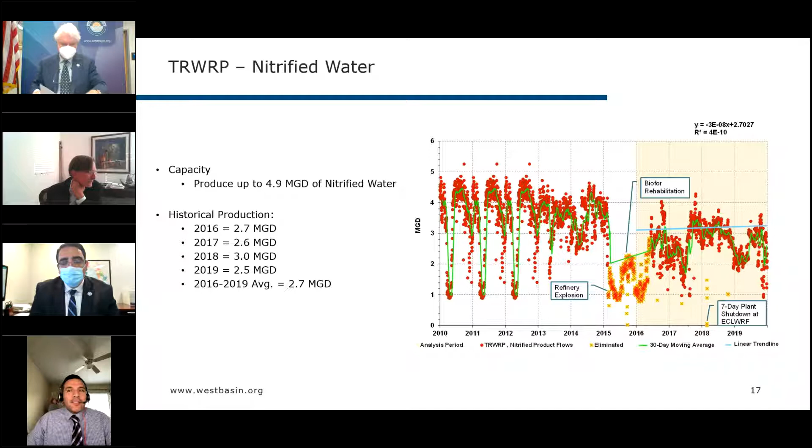All right, now please turn to slide 19 of the presentation handout.

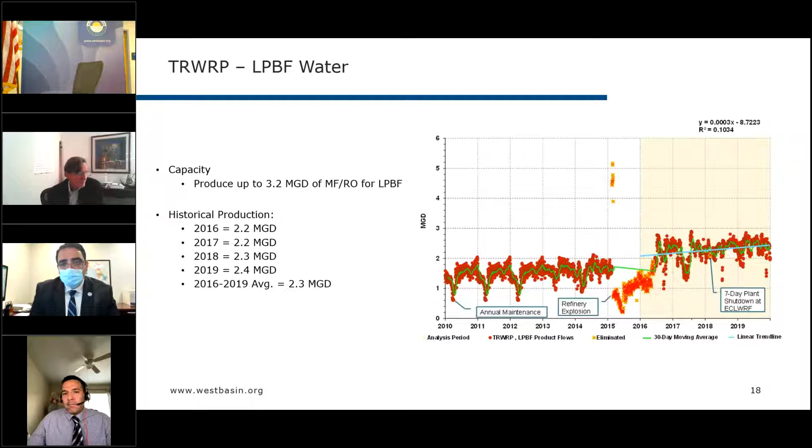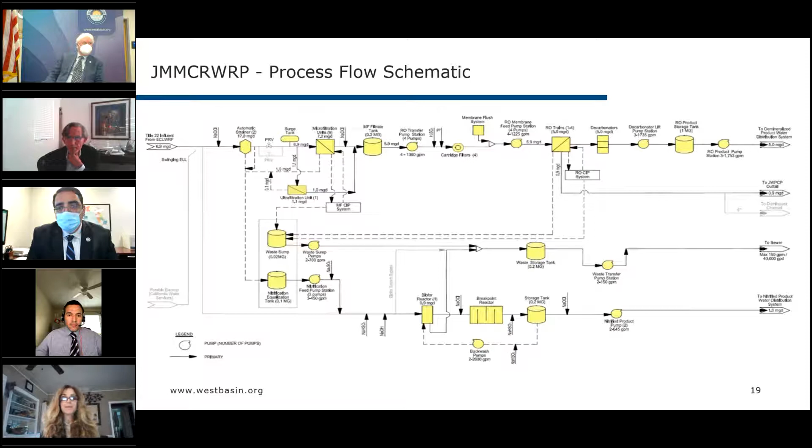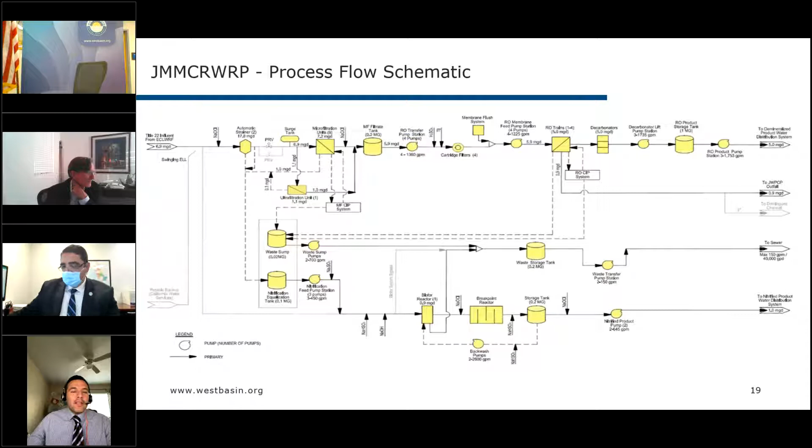Please turn to slide 21. Orlando, if I may, just on the nitrified - the main difference with this nitrified plant and the other two, which is the Chevron nitrification plant and Torrance, is that we produce way more nitrified water for those two. They have 4 units for Chevron, 4 units for Torrance, this one only has 1 unit. The reason is that they take some of the water from the boiler feed and mix it up - they have a bit different setup for Marathon, the water that comes in from the Carson plant. They use a little bit of the MF/RO water, blend it with this nitrified, and use some of it in the cooling tower application.

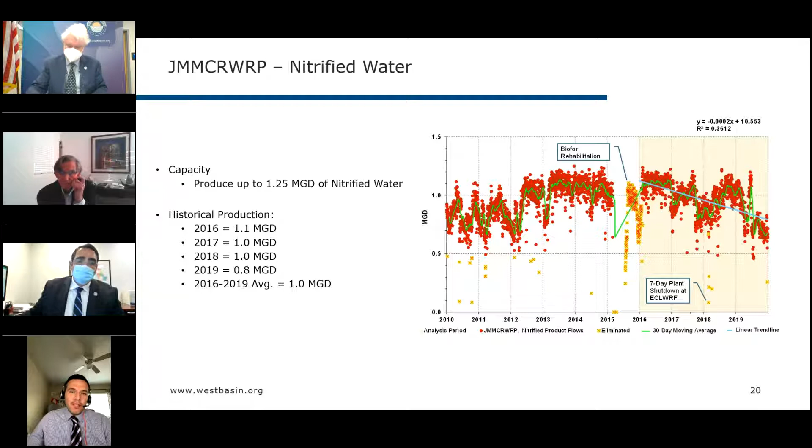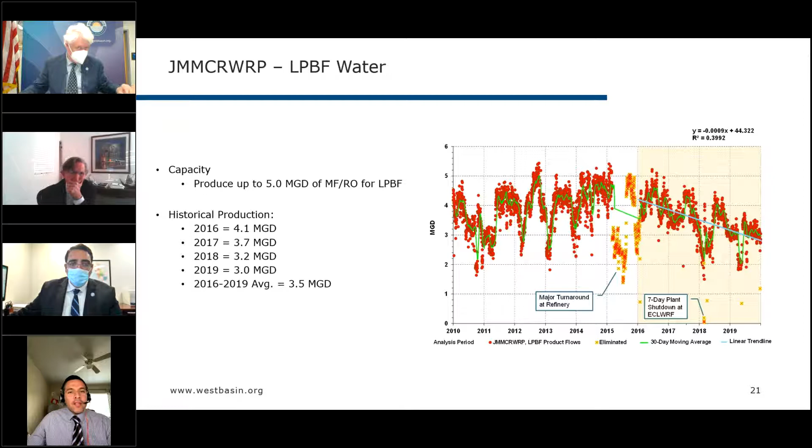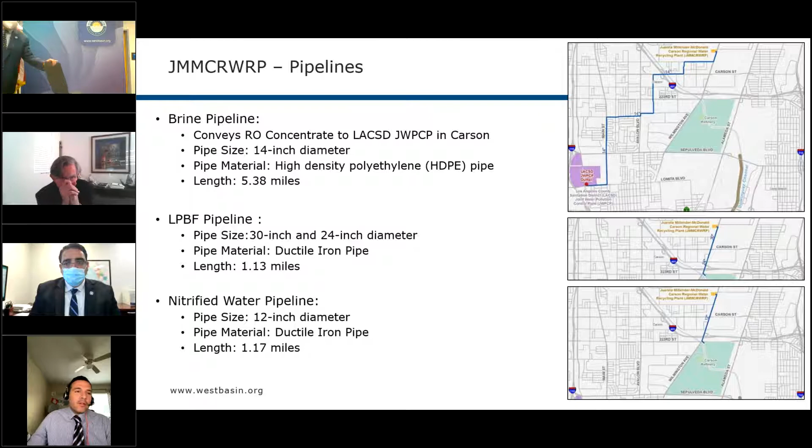Please turn to slide 23. As you can see from all the previous slides and discussion points, the master plan analyzed and evaluated a lot of data from West Basin's recycled water treatment facilities, from the treatment processes to the existing capacities, historical flows, and much more. This data was key in identifying some rehabilitation and replacement projects for the near and long term, as well as some recommended process optimizations that can help improve operations.

Now, if interested, examples of these projects can be found in the capital improvement program, which is chapter 9 of the master plan, along with some of the recommended timelines for when to actually perform these projects.

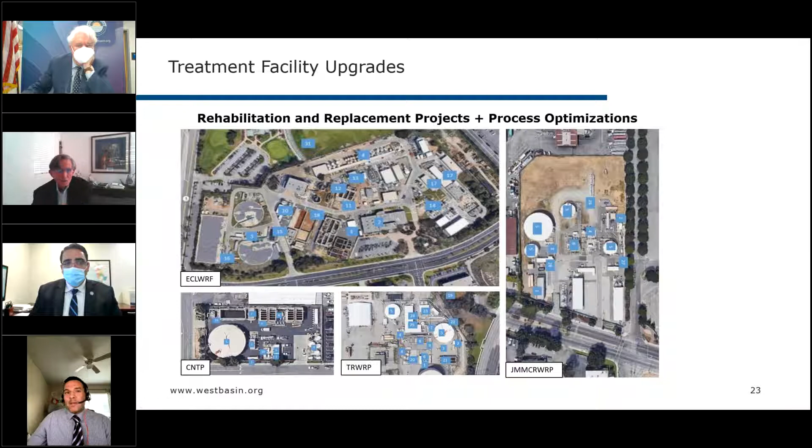All right, that is it. I don't know if Director Alvarez or any other committee members covered a lot of territory, and there's a lot of good information to try to get a handle on what we've got and what our limitations are. I think we'll have follow-up questions and probably want to revisit some of these things in more detail. But to the comment that the general manager made earlier about really looking at the MBR process and installing that at the plant.

As we go forward, we really ought to do as much as we can to go 100% recycled water for indirect potable reuse. And ultimately, you're going to hear me really push for direct potable reuse. So we need to make that investment and be more focused on how we do that.

Right now we're making a lot of investments, not only at one centralized plant but at these terminal plants. They add a lot of O&M costs. They're on land that we don't necessarily own, that we lease. So there's a lot of issues with that. A lot of that could be short-circuited if we could produce all of this water at one or two centralized locations.

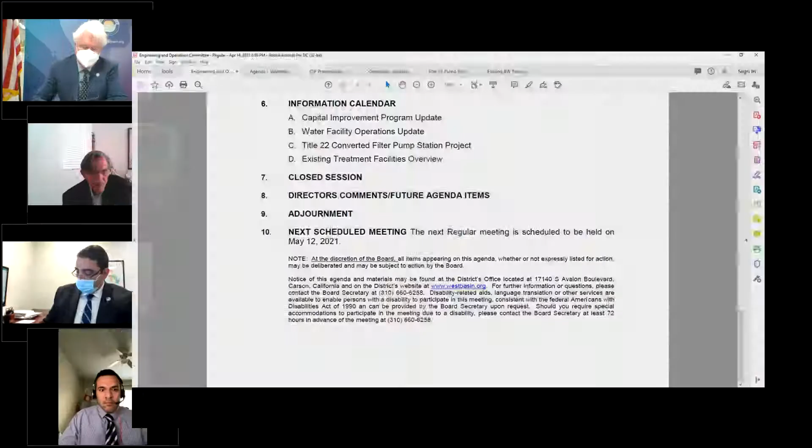That's an easy statement to make. There's a lot that goes into that statement, including making sure that we have the water source, the raw water source procured on a long-term basis, and what that amount of water requirement is. As we look at the recycled water master plan, I think we ought to do a little bit more work tweaking that master plan to address that. Some of those questions and concerns I'm raising are covered in there, but they're not really tied together.

So with that general comment, it's already 7 o'clock, and I know Director Houston said he needed to go, so we'll wrap this up. Director Houston, do you have any comments?

Yeah, I just want to say a couple really brief things. One is I really want to thank staff for this extremely thorough presentation. I remember when I first flipped through it, I saw how many pages it was, so I do want to commend you. It's a lot to take in. It's unfortunate that we are not all here to listen to that for various reasons.

I think at some point we're going to have a specific conversation, as Director Alvarez mentioned, that's solely about this in a much tighter context, where board members can really get into the weeds a bit, but yet it's got to be at a high enough level. Sometimes staff can talk individually with directors on some of the nuances, but all that being said, I completely hear where Director Alvarez and those questions were going, and some of the things he was talking about and capacity issues.

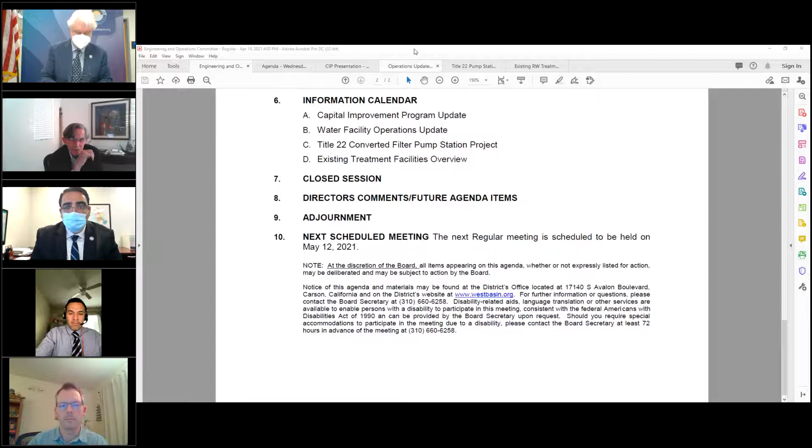Okay, so let's wrap up the meeting. On the other information items on the information calendar, we'll skip them. We have the background material, and I think we can just go over that. If anybody has any questions, they can bring them to the staff for answers. There's no closed session, so the last item is director comments and future agenda items.

Director Houston, do you have any comments? I basically gave them all for the most part, although I would still say again, thank you, staff. I know it was a long meeting, it was a good meeting, and yes, I have already perused most of this, and we'll go back and look at some of the other things we didn't get to talk about. I just want to assure you, I really always thoroughly read my packets. I look through them. I think you all known that for years with me, but I learn something new all the time. And today was really good getting in the weeds. So I want to say thank you.

The only other thing was the ad hoc committees. I know that we're moving forward, and I'm not sure how those get reported out. I think Director Alvarez may look at that, but I just want to mention that we have been starting to move forward, at least with one of the ad hocs, and I think that's a very good step. So with that, thank you, Mr. Chair. All right, thank you, Director Houston.

So just a couple of comments on that. First, with respect to the ad hoc committees, we do have the Brewer DeSalter ad hoc committee. That committee's met twice and we'll be meeting again. It's moving forward, it's got an agenda. We're working with the general manager on trying to expedite that process. We've set a timeline of trying to get through that in 180 days. That's maybe a little bit aggressive, but at least it sets a timeline.

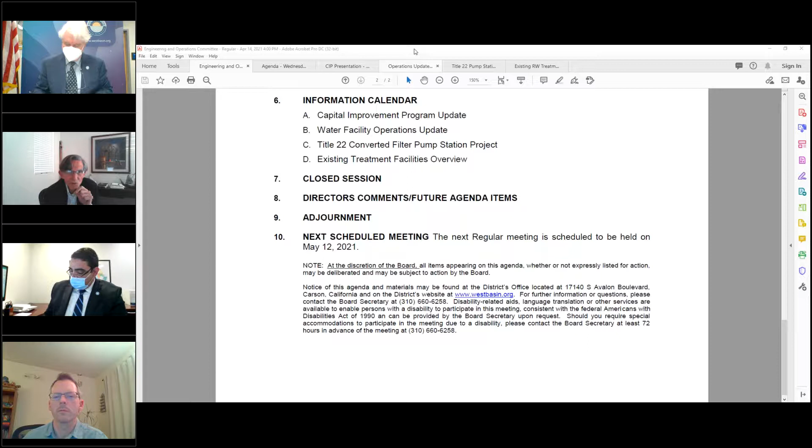We'll probably want to come back and revisit some of the treatment facilities issues we've identified, in terms of how we should focus until we have a better idea of improving the amount of water we're producing for indirect potable reuse, and how we can do that in a more efficient fashion. So it's both improving the efficiency of the system, but also improving the overall capacity of the system and where our shortfalls are right now.

And along those lines, I'd also probably want to add a discussion of our distribution system and where we're headed with the distribution system. Is that consistent with a long-term commitment to indirect and then direct potable reuse?

So with that, staff, do you have any comments or questions or any additions?

No, it was a great meeting and a wonderful presentation, last one especially there by Orlando at home with his young baby, and great input from the board. Some of this, in terms of the bigger picture discussion on what's next for West Basin and looking more long-term, that will be part of the soon-to-be conducted retreat - that'll be a big part of it. So we'll be there very shortly, on the 15th, May 15th.